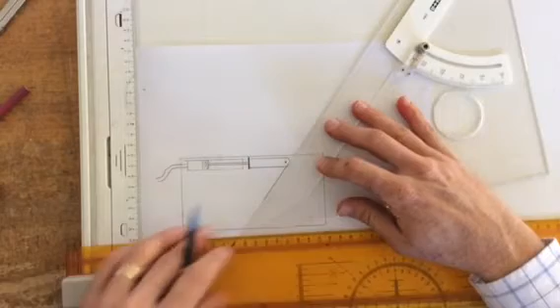Take that right the way down. Once I've got that, that then comes across to the door, which is connected to another lever over here. So this is connected to another lever which is connected to the door.

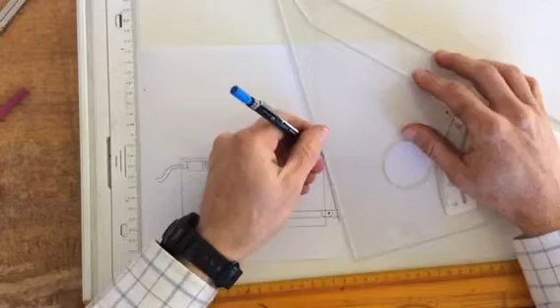Everybody understand that idea? All right. I also have an attachment point over there. Let me just show you what I've got there. There it is. Happy with that? There it is in the diagram. See that idea? All right.

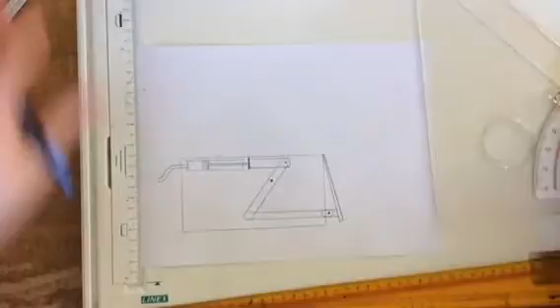Once I've got that, I then need to get a top view of this thing. How do I do that? I'm going to project lines up from this view, construction lines - just very light lines going up - and I can now draw the top view in. There's the box looking from the top of it. And what will I see at the top?

All right, you'll have a syringe over here, which has that little lever over there, going down onto a lever coming down here, which then goes across to there, which then goes to the door over there. Right, so let's draw that.

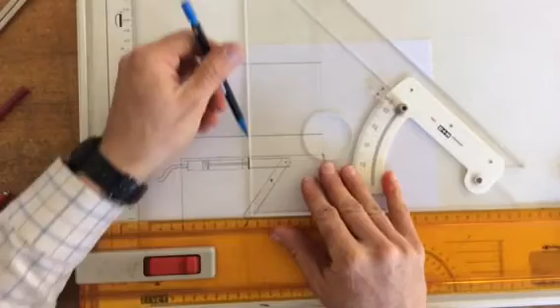My syringe, obviously, needs to line up with the syringe. Can you see how I'm using this idea of lining things up so that it all links up with my top view? There it is, there's my syringe.

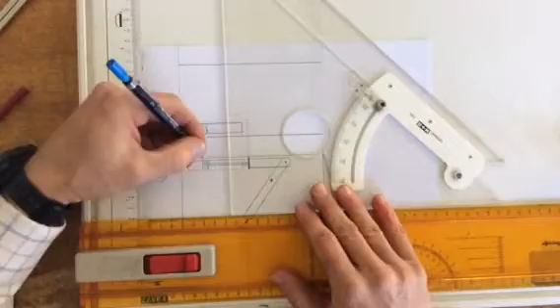You can see the plunger in the syringe. See it - the plunger is at the same place in the top and the front view. There it is. It's got the plunger going over here. There it is. It's going to look basically identical to the front view.

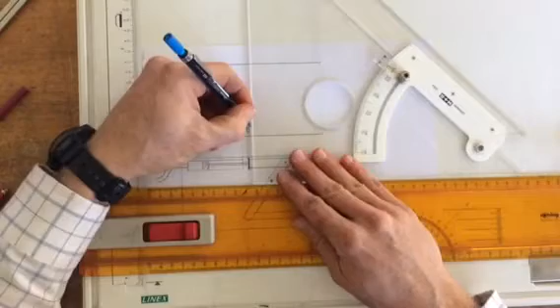Okay, and this is where the changes are going to start happening, where I start seeing how the lever over here - there's my lever, which then bends round over here and continues along the side of this thing - and that finishes over there.

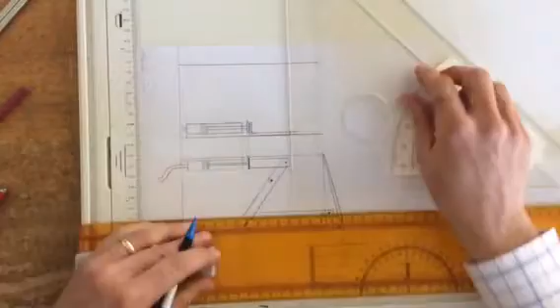That then I'll see some hidden detail of the syringe. Can you see the base of the syringe? Not the syringe, the lever over here. So I'd be able to see my lever, which is connected over here, coming all the way down here.

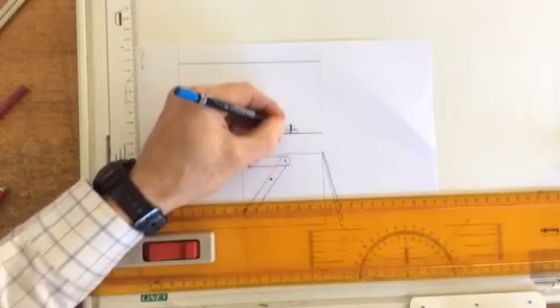And I have a little bolt which connects these two. You can see the bolt over there, there's the bolt over there. Right, that then gets connected to another lever, which then comes forward again, all the way to the garage door.

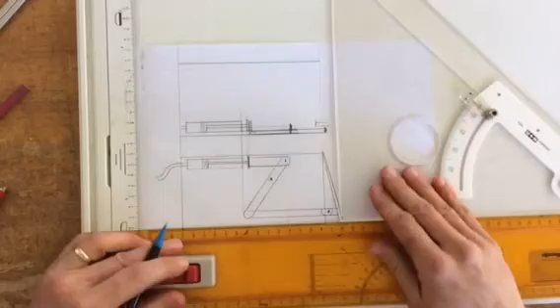And that gets connected to another little lever, which is connected to the garage door itself. All right, there's the last lever.

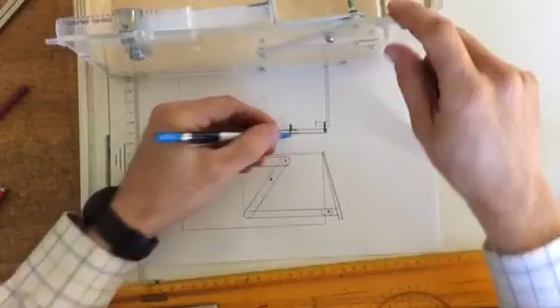Right, let's have a look at what that looks like. There it is, you can see the little lever. There's the little lever. You're seeing this idea of how that view and that view must line up. I must be able to see all the detail that's happening over here in this view, but from the top.